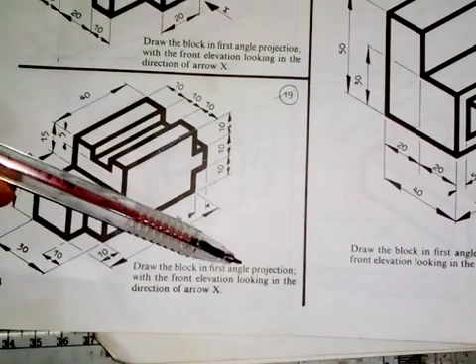Welcome to my channel. Here we'll be working on this object to produce the orthographic views of this object. Draw the block in first angle projection with the front elevation looking in the direction of arrow X.

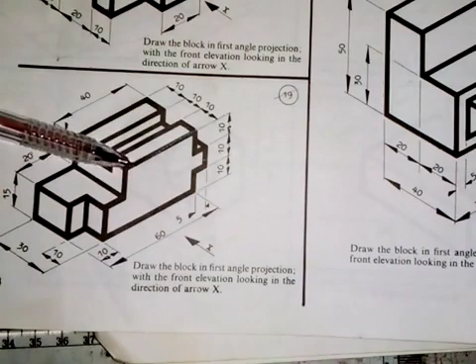So looking at this object in this direction, for the front elevation we are going to have this shape, this rectangle, and this shape that we have here we are going to see as the front view.

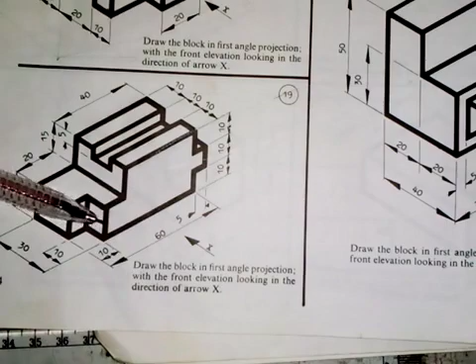And the top view we have this rectangle, this rectangle, this rectangle, and we have this shape here for the top view. And for the end elevation we are going to see this rectangle and this shape. So those are the things that we are going to put together to get the orthographic views of the object. So we are starting with the front elevation.

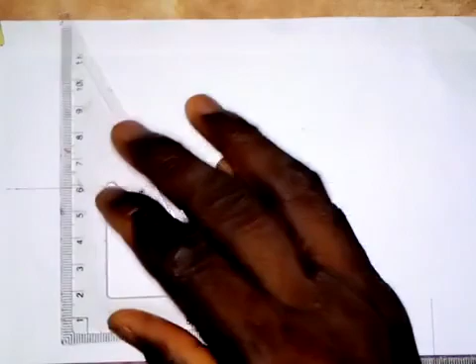So what you need to do first is come here and draw a horizontal line like this. Okay, so then we fix a point here, and fix a point here.

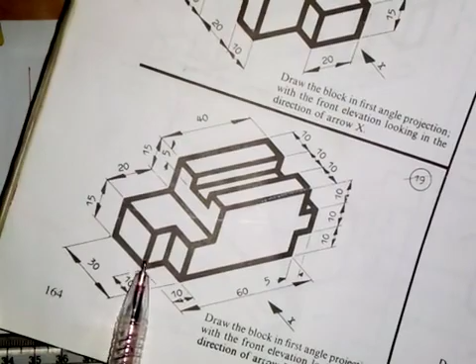Now let's first of all start with this rectangle that we have here. For this rectangle, distance from here to here is 10 millimeters, from here to here is 10 millimeters, and distance from here to here is 15 millimeters.

So we first of all take a measurement of 10 millimeters here, come up here, we take 15 millimeters. So this is 15 millimeters. So here we are going to draw a vertical line at this point, and on this point we draw a horizontal line. So that rectangle has come out already if you look at it very well.

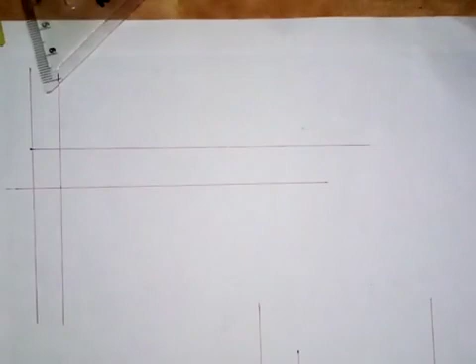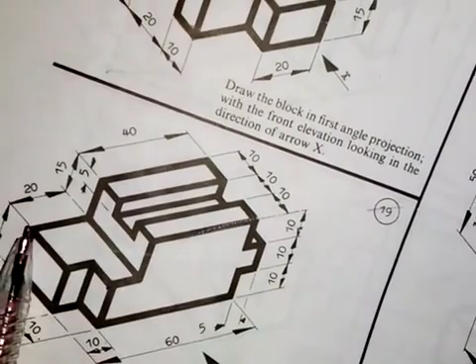So then we have to bring out this shape here. Distance from here to here is 15, which we have already done. The distance from here to here is also 10 millimeters. So total from here to here is 20. We have taken 10 from here to here, so we need to take another 10, because total is 20. So we take 10 again.

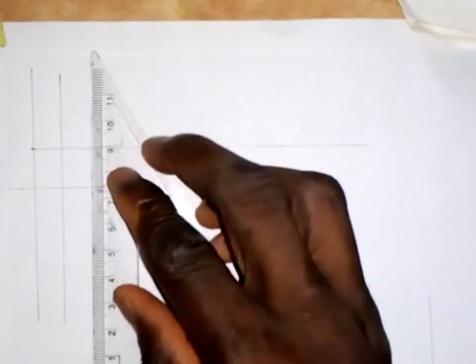Then we take distance from here to here as 40, and distance from here to here on this small part is 5 millimeters. So we are going to take 10. We come here and take 10 millimeters like this. At this point we draw a vertical line.

Okay, then we are going to take a measurement of 45 millimeters. Let me first of all take 40, so this is 40 millimeters, and we take 5 like this. Here I'm going to draw a vertical line at this point, and we also draw a vertical line at this point here.

Alright, so let's come here and look at the height of this object. From here to here it is 10, from here to here it is 10, from here to here it is 10, that is 30. So we take a measurement of 30 millimeters, this is 30 millimeters, and we are going to draw a horizontal line at this point.

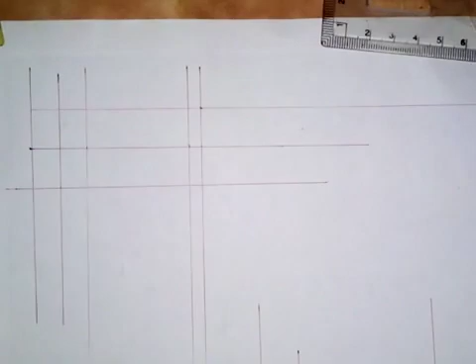Okay, so again, I'm going to come down here and take 10 millimeters, 10 millimeters, as we see on that object. So this is 10 and this is 10. Here I'm going to draw a horizontal line on each of these points.

Okay, so looking at what we have here, the front elevation has come out as you can see. Let me show you how it will look. This will be a rectangle, the first rectangle that we produced. I'm just bringing it out one by one.

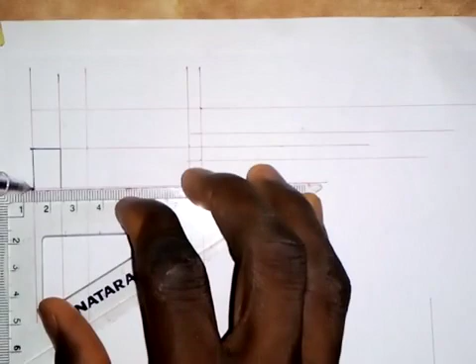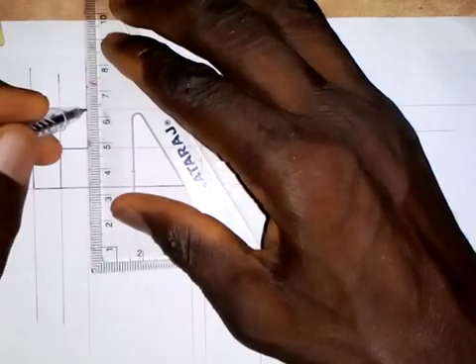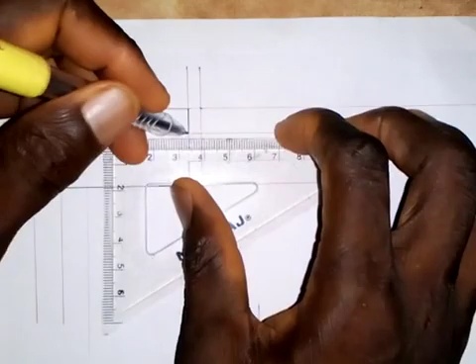So this line, from here to here, will be a thick line. Also this line will be a thick line to this point, and this line too. So from here to here will be a thick line, down to this point, and also here it will be a thick line. Then this line will be a thick line from here to here, and we bring this out as a thick line.

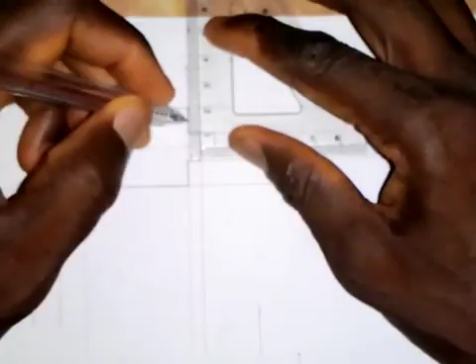So if you look at what we have here, the front elevation is not done yet, because there is a feature here that is cut off, and to this front elevation it will be hidden from us, so we need to draw it. The distance from here to here, as given, is 5 millimeters, so we take a measurement of 5 millimeters down. Here we are going to draw a horizontal line.

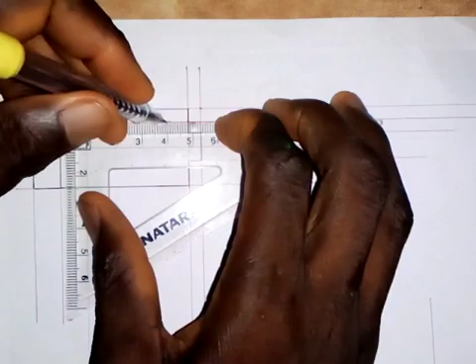So that is the front elevation. Let's see what we have: this rectangle, this is it. So we have this shape like this from here to here. It goes like this, and also this part we have it here. So the front elevation is completed.

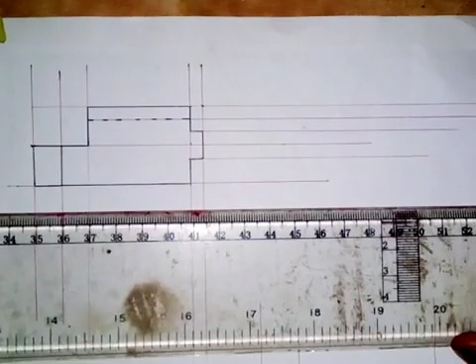So let's go to the plan. For the plan, we move down a little bit from the front elevation and draw a horizontal line. What we want to bring out in the plan is this rectangle and this shape here. So let's start with this one: from here to here is 20, which has already been taken as 20. So we just need to bring out this shape here.

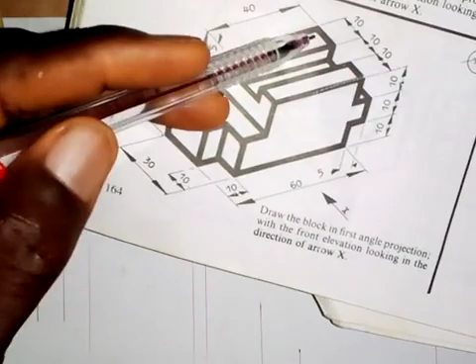So the total distance from here to here is 30 millimeters. From here to here is 20, from here to here is 10. So we take a measurement of 20 millimeters, this is 20 millimeters, then we take 10, so this is 10 millimeters.

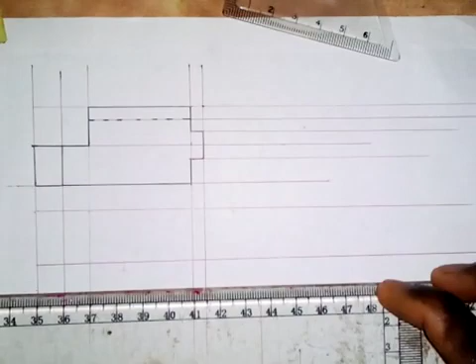So we are going to draw a horizontal line on each of these points, like this, and also another horizontal line like this. So that shape that I showed you has already come out. So this is it, let's bring it out.

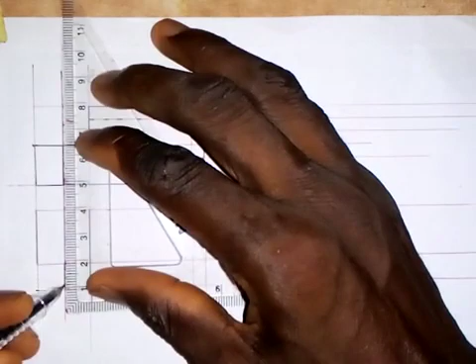So this line will be a thick line from here to here, and this line will also be a thick line, and this line too. So from here to here, we have this to be a thick line, and this to be a thick line, and then this to be a thick line. So you can see that shape has come out.

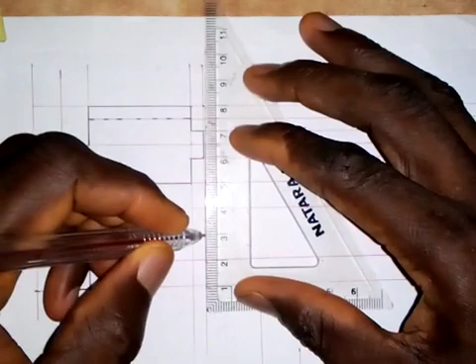So what we need to do now is get this rectangle and this rectangle. It is 10, 10, 10. So we come here and take 10, this is 10 millimeters, and this is 10. We already have 10 here.

So what we need to do now is draw a horizontal line from this point, here we draw a horizontal line like this. So we have already drawn for this one.

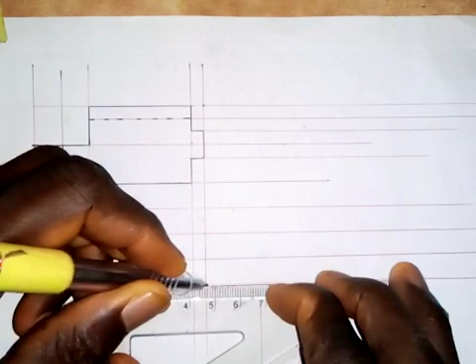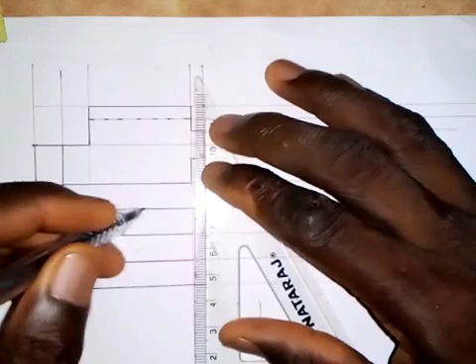So let's bring out the rectangle. From here, this will be a thick line all straight down, and all straight down. So this rectangle is from here to here. Also this will be a straight line down here, and this line we are going to make a thick line all through, and this line too will be a thick line all through here.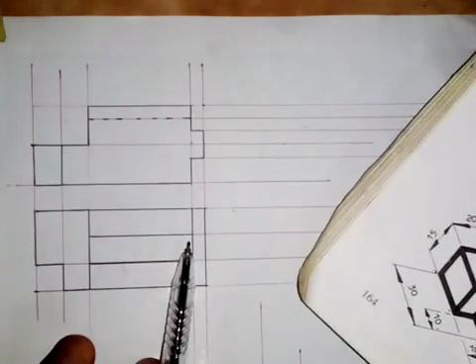So I'll come and show you. Alright, so this rectangle that we have here, you can see it goes from here to here, which is the same distance. For this one we also have the same thing, and for this we also have the same thing. So this line that we have here forms a rectangle that goes from here to this end. Though part of it is hidden and we can't see part of it, it is there when we look at it from the top down.

Alright, so this is the plan. We have formed the plan as it is given to us. So the next thing we are going to do is draw the end elevation.

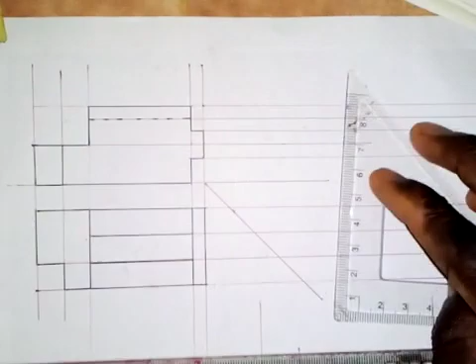So to draw the end elevation, we have to place our 45 degree set square at this point and draw an inclined line in this direction. Wherever this line touches the horizontal lines produced out of the plan, we mark those points here, here, here, and here. So we draw a vertical line on each of the points.

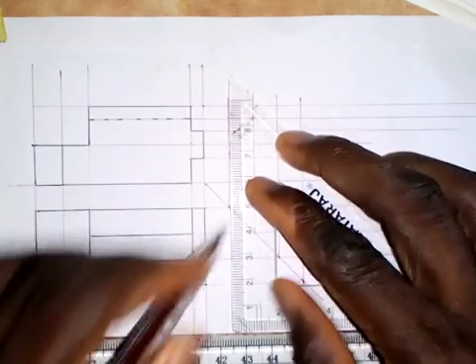So here we draw a vertical line, and here also we draw a vertical line. So here we draw a vertical line, and at this point we draw a vertical line here, like this. So what do we have for the front view? We can see this rectangle, this rectangle, and this top part. Let's see how that's going to be.

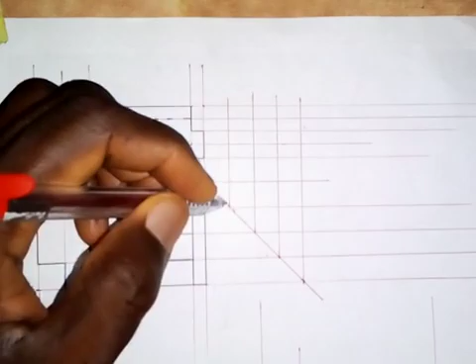So for the first rectangle, we follow this line. Let's start with this. So we follow this line here, and we have this point. Then we follow this one like this, so we have this point here. If we go like this, it's going to end here. So this is the rectangle.

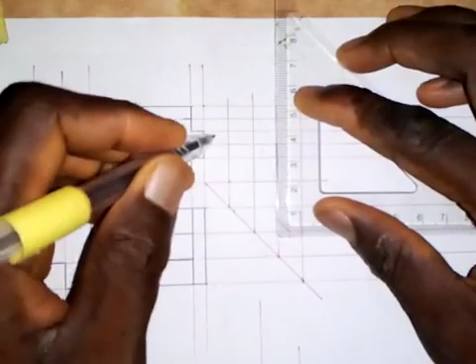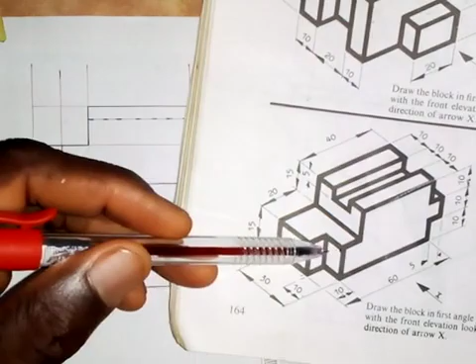So that rectangle has come out, this is it. Now there's a rectangle here too that we need to bring down. So where do we have it? It's from here, so we have the first point here, and the second point is from here to here, so we have it here. If you follow, they are at the same level.

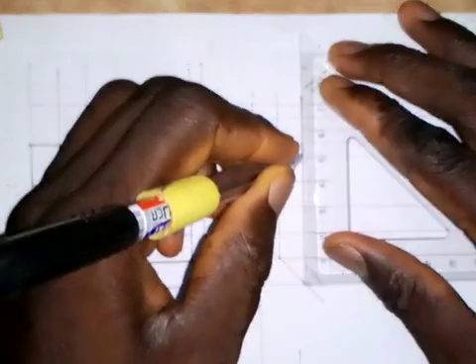So I need to make this a thick line, and this line will also be a thick line here, and also this line is a thick line. So we have the two rectangles drawn, I mean this rectangle and this rectangle here.

So we now have the top part here, the top part, this shape like this, we have to bring it out. So where do we have it? We have it up here. This line here that we have is already drawn from here to here. It's already drawn, at this point, I mean this line here.

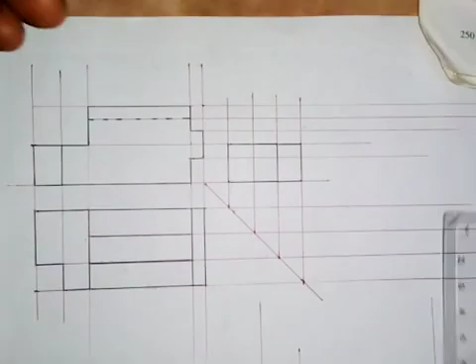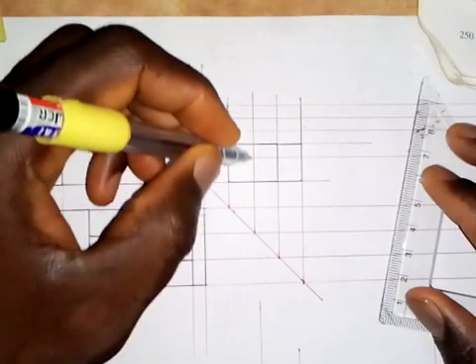So we need to bring out this shape now, and to do that this line here will be a thick line down from here to here. Also this will be a thick line from here to here. So this is where we have it, from here to this point, just follow this line like this, and we go up, come up to this point. Follow this line like this, and we come up here, this point here.

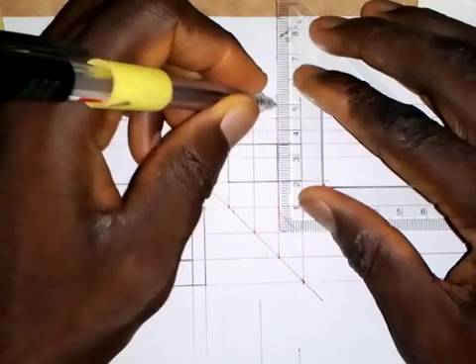So we are going to have the same thing here, so we have this point. All we need to do is make this a thick line, make this also a thick line, and this will be a thick line from here to here. Also have a thick line from here to here. This line will also be a thick line to bring out that shape.

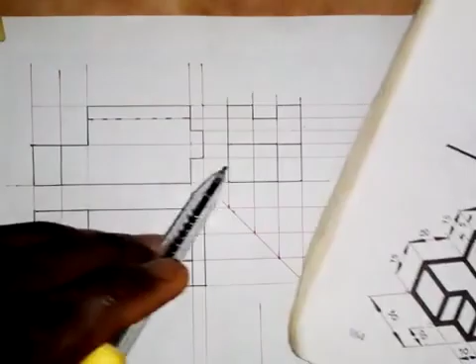So the shape has come out, as you can see there. We have this rectangle, this is it. We have this rectangle, so this is it. We have this shape, and this is where we have it.

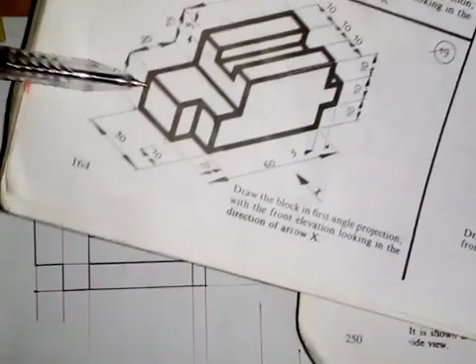But another thing is, this point here is going to be hidden from us. This line that goes here is going to be hidden from us. So where do we have it? I need to get it out from here, since it is not shown here. So where do we have that? We have it here.

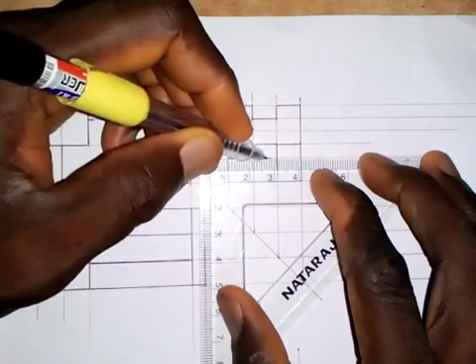So it is true, the one up here and the one down here are going to be hidden from us. So what we need to do is make this a short dashes line. Also coming up here, this will also be a short dashes line. It's a hidden detail.

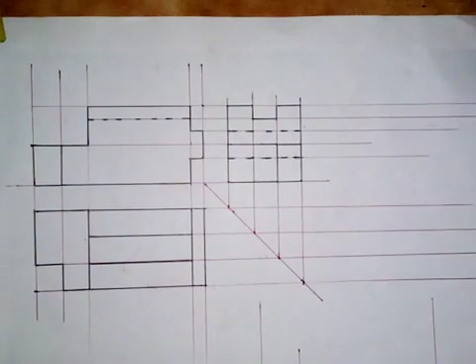So this is the end elevation, this is how it will look. All you need to do is practice. Thank you, and keep on practicing.